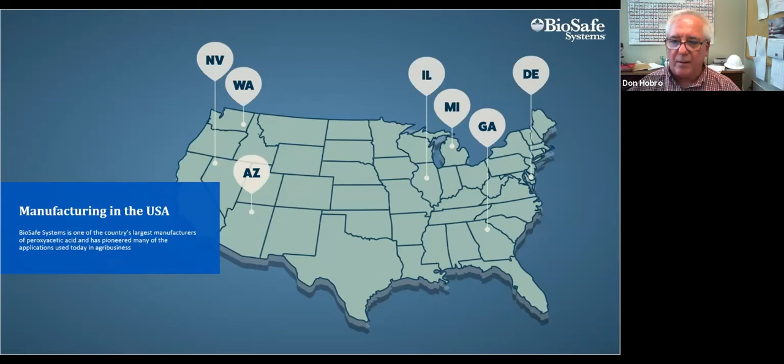BioSafe has developed world-class expertise providing sustainable water treatment solutions to the following industries: agriculture and food safety, pre- and post-harvest, horticulture, wastewater, meat, poultry, and seafood husbandry and processing, as well as controlled environment agriculture, which includes hydroponic greenhouses and vertical hydroponic growing. Our products also provide superior control of slimy biofilm in engineered water systems.

BioSafe's regulatory compliance professionals work closely with the pertinent agencies to ensure product quality and transparency. While our traditional PAA products carry up-to-date EPA application labels, OxyFusion, a chemical generator that consumes 3 precursors, is registered with the EPA as a pesticide device. Also, the Food and Drug Administration acknowledges OxyFusion on-site generated PAA with a Food Contact Notification, also known as an FCN, as an antimicrobial to control microorganisms in processed water used during the commercial processing of meat, poultry, and seafood, as well as fruits and vegetables that are not raw agricultural commodities. And that's a quote.

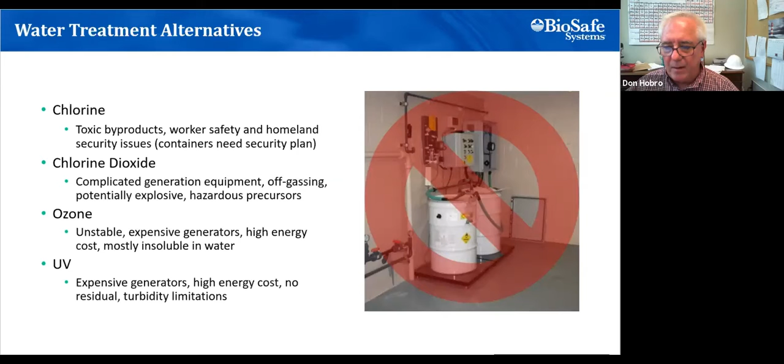UV light is an acceptable disinfectant in certain applications, certainly not where a biological residual is required. For example, in food processing, UV light is often used for environmental disinfection through strategic placement of UV lamps throughout the plant, but it cannot be used in processed water to prevent cross-contamination of freshly cut fruits and vegetables, for example.

Here are some additional comparisons of PAA with those common biocides. Only PAA hits all the marks from sustainability to efficacy to worker safety.

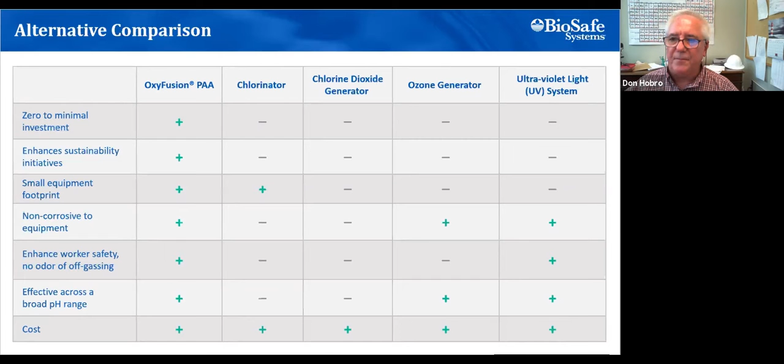Let's focus on OxyFusion. OxyFusion is an economical and unique 3-precursor system for the on-site generation of peroxyacetic acid. In contrast to standard or equilibrium PAA, the OxyFusion product is alkaline, non-corrosive, and odor-free. The entire process from generation to dosing and monitoring is PLC controlled. Process variables are data logged to provide timestamp documentation of food safety and other parameters.

Before we get into the technical details differentiating standard or equilibrium PAA with OxyFusion, let's watch a short video introducing the OxyFusion chemical generator.

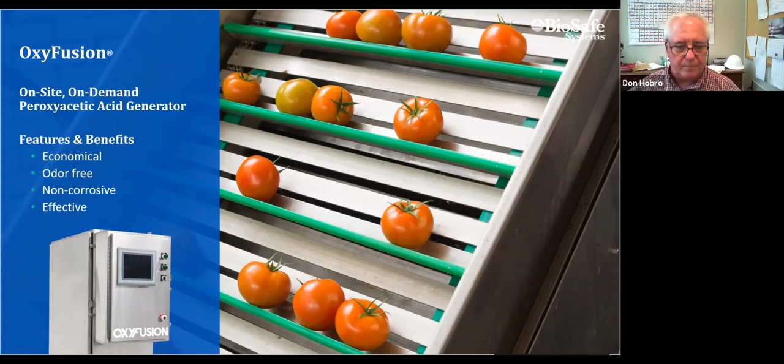BioSafe Systems is pleased to introduce OxyFusion, an on-site, on-demand peroxyacetic acid generator. This system allows users to create a powerful and effective solution in high volumes for a variety of applications. OxyFusion's PAA differs from traditional PAA in that it is generated at a high pH with less corrosivity and no odor.

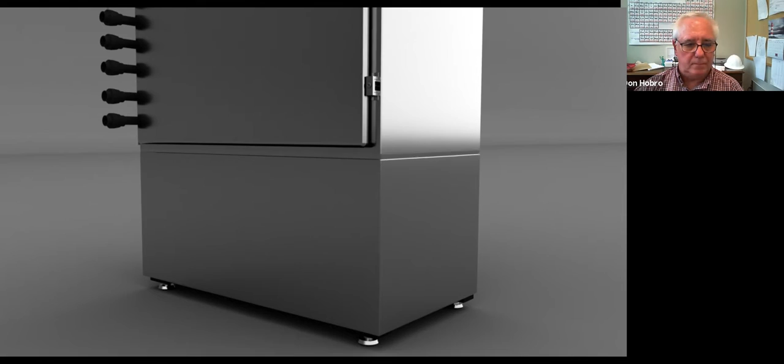With the push of a button or the click of a mouse, OxyFusion accurately blends the concentrated precursors into a potable-grade feed water stream. After dosing the PAA, the pH in the process stream can be adjusted to any practical level. This proprietary technology takes all the guesswork out of utilizing PAA for water treatment.

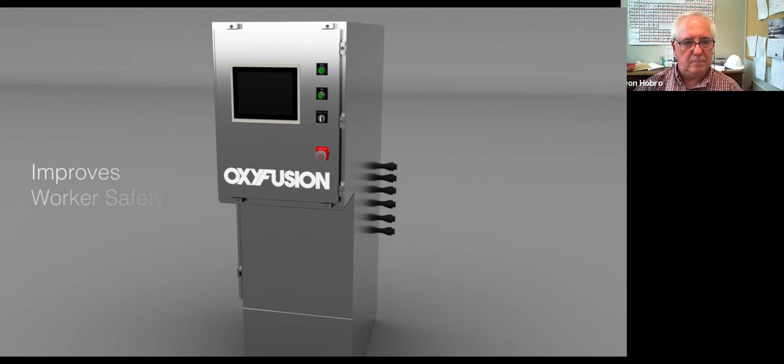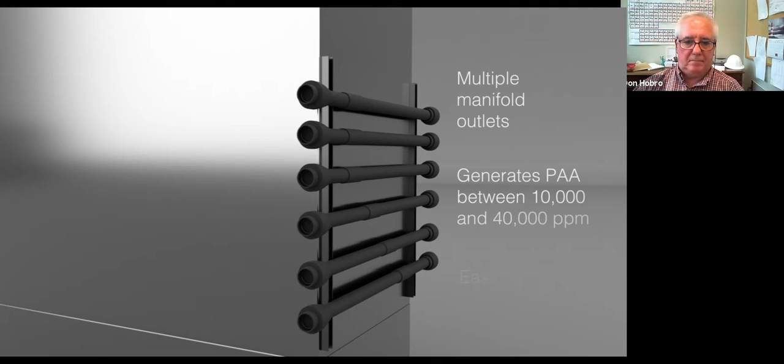The concentration, dosing, and monitoring are all handled by the system, improving worker safety and productivity. Concentrated precursors limit material handling and worker exposure because the solution is created on-site and doesn't travel. Equipped with multiple manifold outlets, OxyFusion can produce separate lines of concentrated PAA at different parts per million to carry PAA for a separate application to different water sources simultaneously.

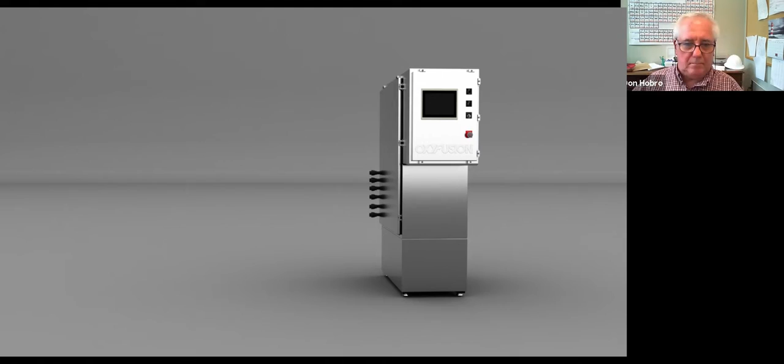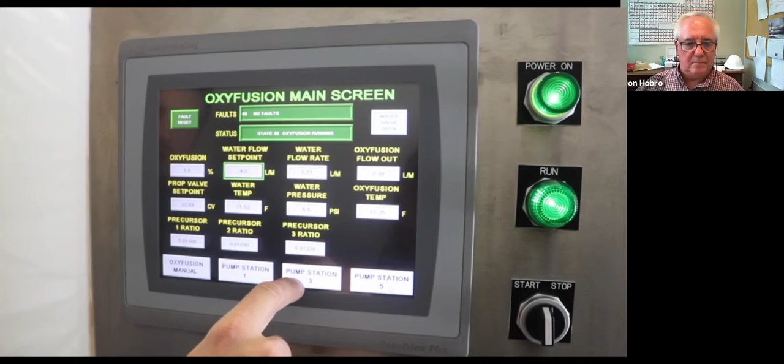OxyFusion is constructed with stainless steel cabinets and stands about the size of a household refrigerator. With state-of-the-art control technology, OxyFusion produces a consistent and reproducible product. Redundant pumps provide backups automatically in case of a pump malfunction. The human-machine interface, or HMI, provides complete touchscreen communication between the machine and user for easy setup and operation.

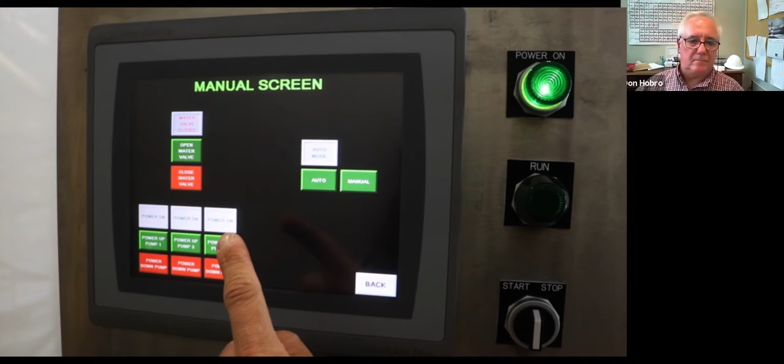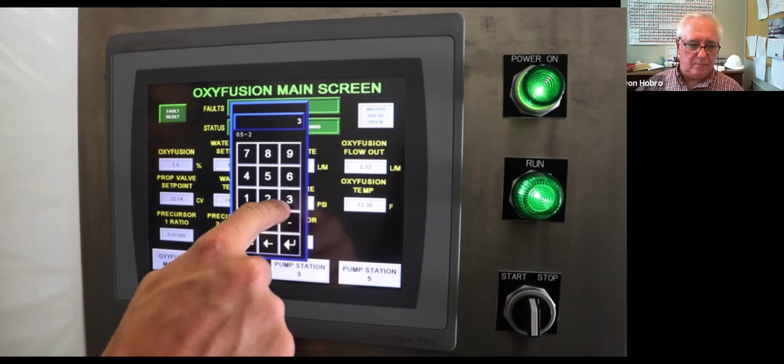The interactive HMI screen lets users conveniently adjust the concentration of the generated PAA, as well as calculate the diluted concentration in the process stream. The PLC is programmed to alert users of faults or errors such as temperature, pressure, or concentration changes. Users receive this notification via pop-up on the HMI, email, and through the mobile app.

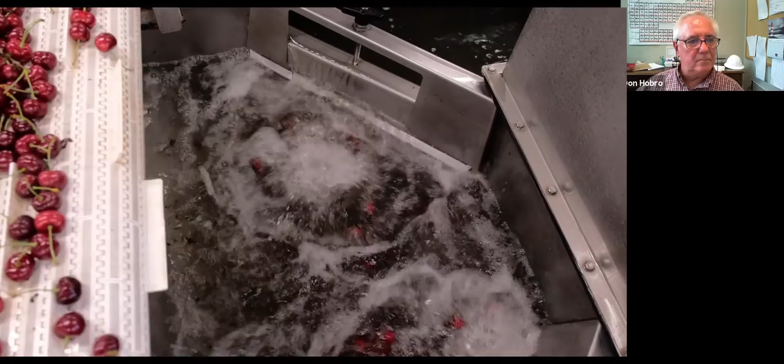The collaboration between smart technology and OxyFusion gives users the ability to adjust, track, and share information instantly. Adhering to food safety and other regulatory considerations, a huge amount of data can be collected, logged, and shared to the cloud, including the operations and compliance data. Some customizable reporting features include temperature or pH changes, flow rate, concentration rate, and time-stamped dosing information.

All the data is available via remote messaging and alerts to help identify a problem. Data sheets are stored in the BioSafe Systems cloud and can easily be downloaded or uploaded. BioSafe Systems celebrates over 20 years of success manufacturing PAA and is looking forward to the next 20 years of innovation.

There's that refrigerator again. Inside the OxyFusion generator, 3 precursors are precisely metered into a flowing water stream. Then the generated OxyFusion solution goes to a small dosing tank from where it is dispensed to the application. The HMI on the control panel allows the user to set the flow rate and PAA concentration, while all controls

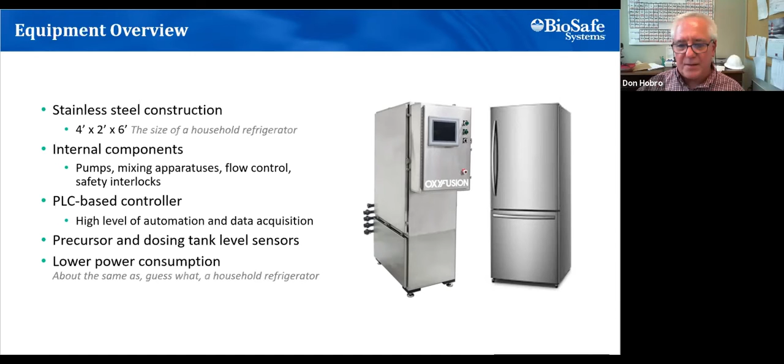and safety interlocks are driven by PLCs. Data is pulled from the PLCs to cloud servers so that the operational and food safety related parameters can be accessed remotely. About the size and energy consumption, a household refrigerator.

Let's have a look at so-called standard or equilibrium peracetic acid, BioSafe Systems core technology. In brief, hydrogen peroxide and glacial acetic acid, think super concentrated vinegar, are blended in various ratios to form the organic peroxide, peroxyacetic acid. The chemical reaction is relatively slow, so blended product solutions must be stored for several days before they reach equilibrium, at which point they are quality tested. Let's take a closer look.

Traditionally, peracetic acid is produced from the reaction between acetic acid and hydrogen peroxide.

Hydroxyethylidene diphosphonic acid, HEDP, is added as a stabilizer to prevent the decomposition of the PAA or hydrogen peroxide. Some formulations use a sulfuric acid catalyst. The resulting solution is an equilibrium blend of the reactants, acetic acid and hydrogen peroxide, and the desired product, PAA, typically in a concentration range of 2 to 25% as PAA. The reaction is slow and may take days in storage for completion.

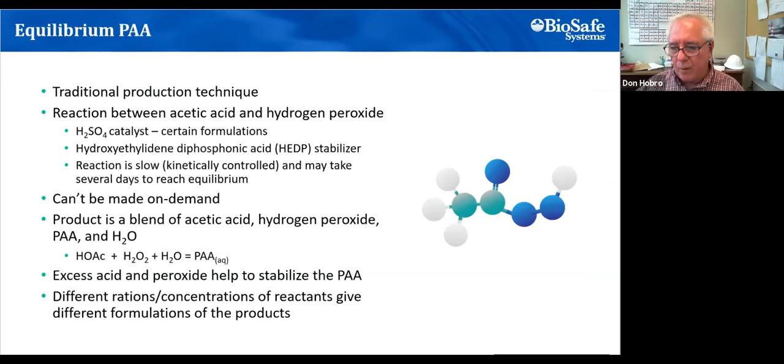Drawbacks to this chemistry include odor and corrosivity from the unreacted acetic acid, which is necessary to stabilize the PAA, and the shipping costs and requirements to deliver it to the end user. Packaging ranges from 1-gallon containers to 330-gallon totes to bulk delivery. Given that some of these products can contain up to 98% water, shipping costs and their related carbon footprint are relatively high for the amount of active component actually shipped.

OxyFusion is made instantaneously and on demand from 3 concentrated precursors. OxyFusion has much lower hydrogen peroxide levels, making it safer to use in hydroponics where the plant roots are exposed, for example. OxyFusion has no acetic acid, making it corrosion and odor free and at a caustic pH. OxyFusion is a versatile chemical reactor generating PAA at up to 40,000 ppm at a gallon a minute. That's about 1,000 pounds as PAA per day.

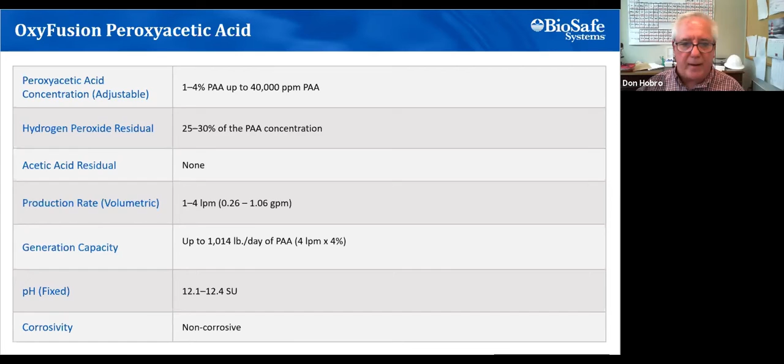In summary, OxyFusion PAA is real PAA that fits nicely into BioSafe Systems' portfolio of water treatment options and our smart technology for process control, data handling, and reporting. Good process control of relatively benign chemistry helps to improve productivity and worker safety. And point of use generation helps reduce shipping costs as compared to pre-blended formulations that contain a lot of water.

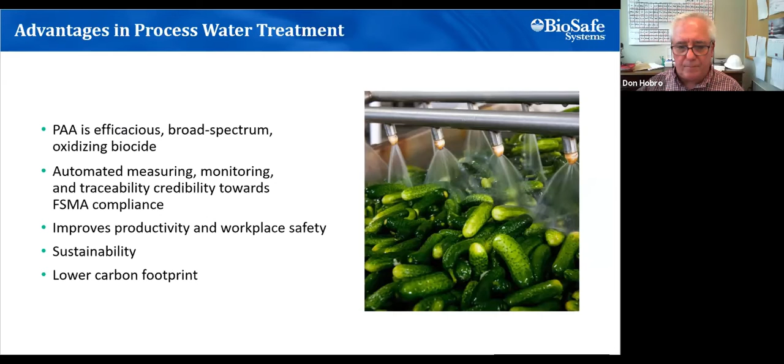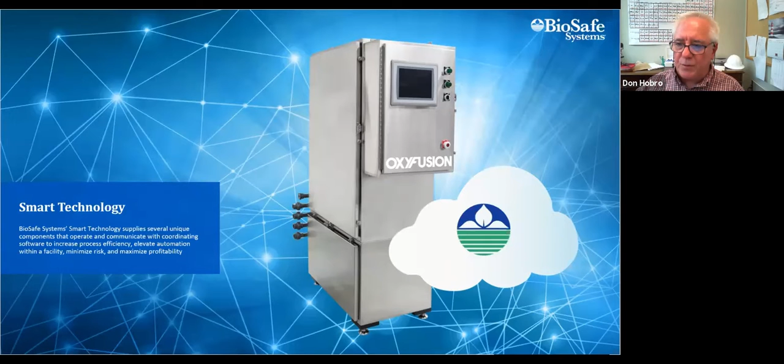BioSafe Systems smart technology uses state-of-the-art cloud technology for remote monitoring of chemical process dosing, monitoring, and control, while archiving data that documents food safety activities and other regulatory compliance parameters.

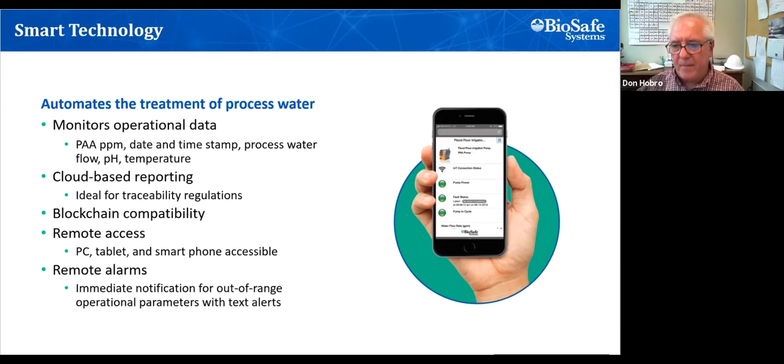BioSafe Systems smart technology automates water treatment with precise process control and monitoring. Out-of-range process variables can be automatically reported to any number of recipients, and customized blockchain compliant reports can be generated at any frequency desired. Data can be viewed on any compatible platform such as PCs and smartphones. Data supporting your food safety initiatives are just a click away.

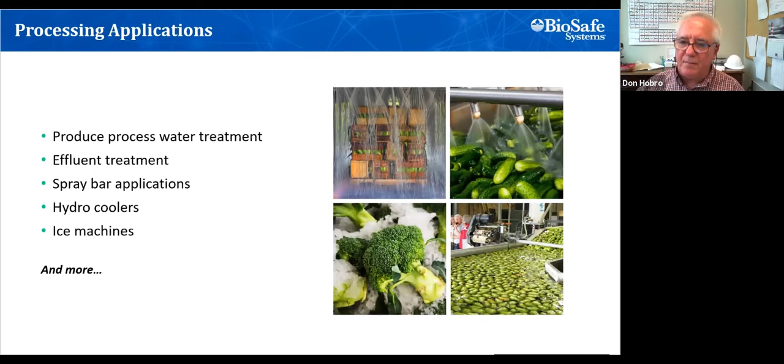For all your needs in post-harvest food processing, think BioSafe Systems and smart technology.

Here's some good news. Qualifying OxyFusion applications require no capital equipment investment from the end user. Under contract, BioSafe delivers, installs, commissions, and maintains the equipment. End users pay for what they use based on the monthly total number of gallons that the OxyFusion generates. This is all monitored remotely.